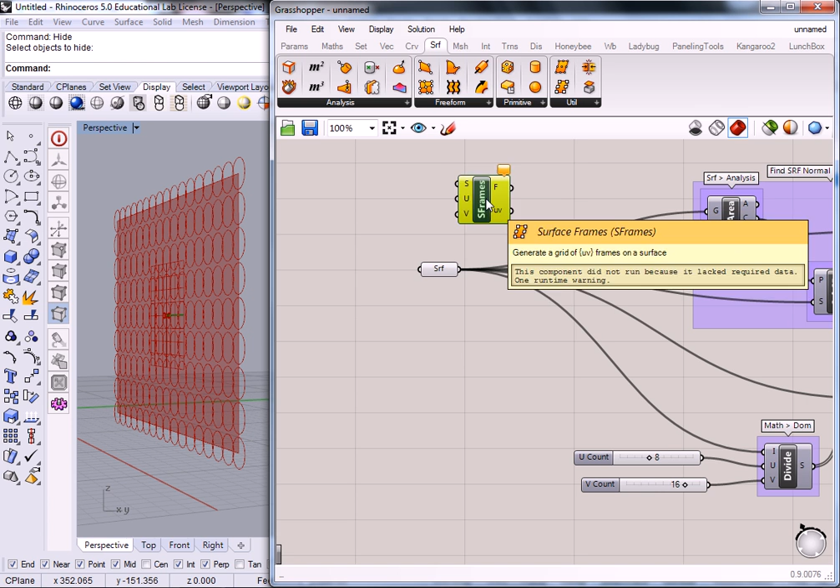Basically this surface, I can deconstruct it and get the edges. So under surface analysis... I don't know if that's what I want. Hold on. This one might be better. No. I might be changing my mind here.

Alright, let's do B-rep edges, we'll try it that way. So, B-rep edges. No, I changed my mind. Sorry guys, I'm just trying to get the right output. Wireframe curve should work, let's try it that way.

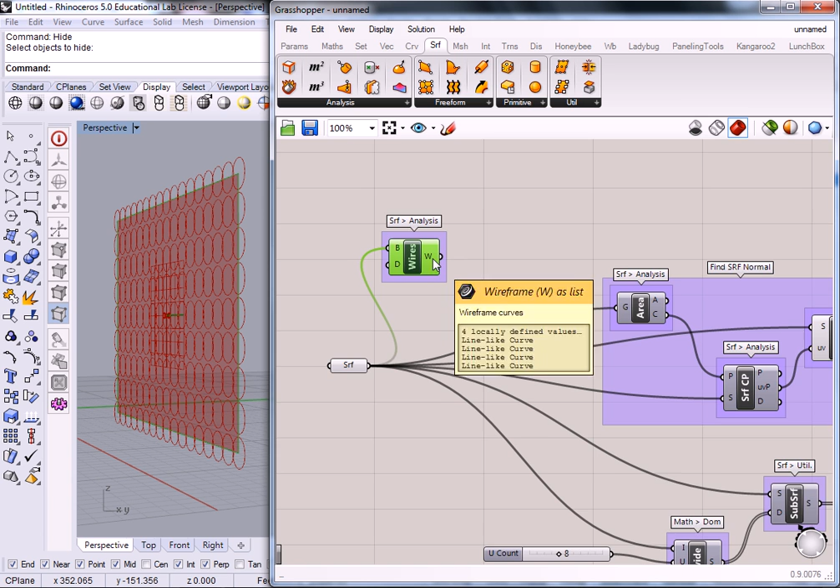All right, so under surface analysis, B-rep wireframe, I'm going to plug in the surface, and it gives me 4 line-like curves. So those 4 line-like curves are the outer edges of the surface itself. So what I can do with that...

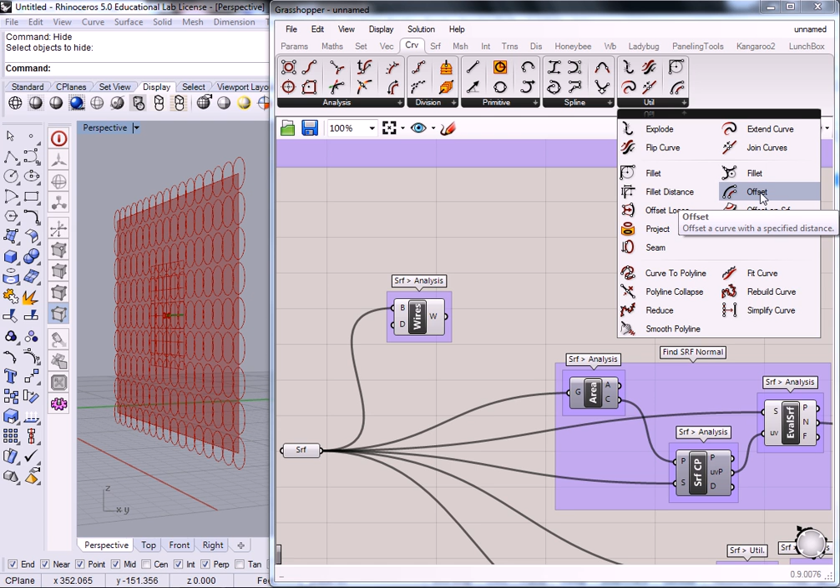Is to offset them. So that's under curve, either analysis or utility. I think it's under utility. Yeah, curve, utility, offset. Move this down. So it's going to ask me for the curves, it's going to ask me for the distance, it's going to ask me for the plane of operation. In this case, it's just going to match the surface itself. And the corners thing is just a setting for how you fix the corners up.

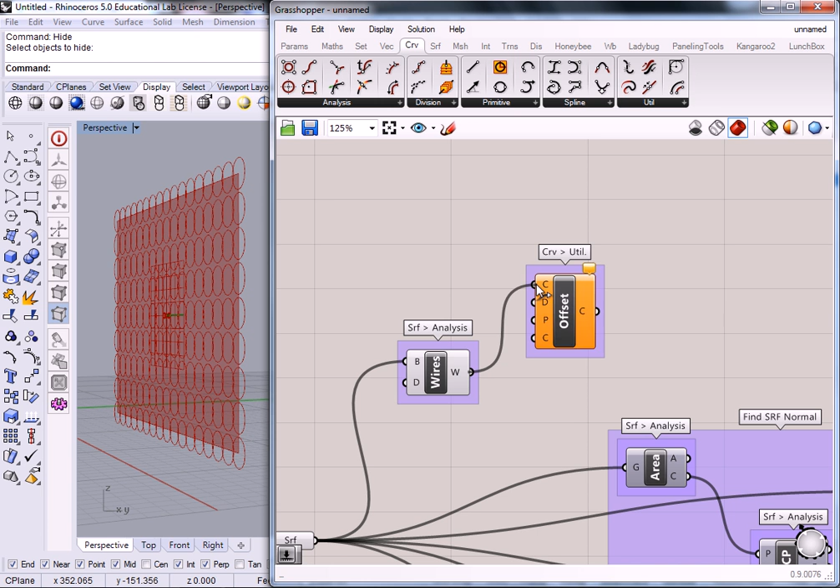So right off the bat, I'm just going to plug in my wires into the curves. And that is not at all doing what it should be doing. Oh, let me try plugging in the plane. So if I can borrow the frame... there we go, that did it.

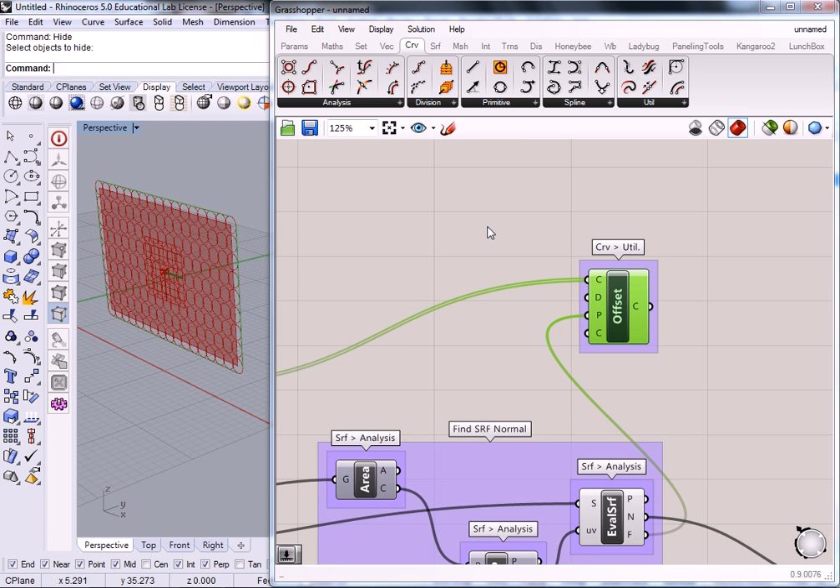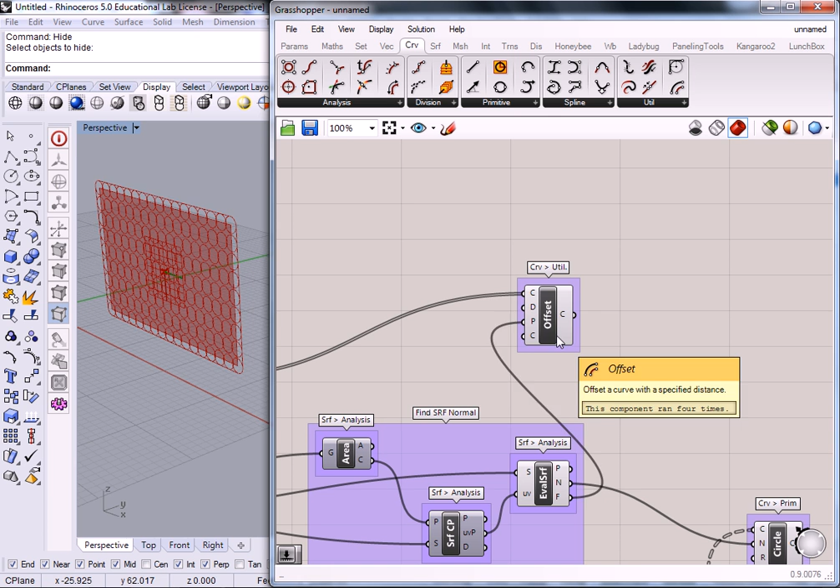All right, I didn't think I was going to have to do that, but I do. So with the reason I grabbed that frame, let me walk you through this. What was happening was that I noticed my curves were out of plane.

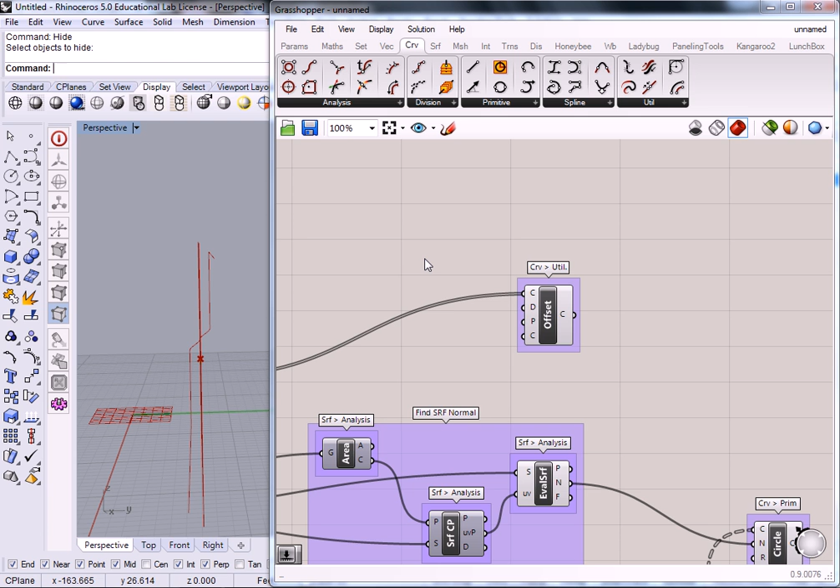And so one of the things we're going to run into quite a bit is that Grasshopper sometimes has a hard time ordering things, particularly with the direction of things. So sometimes if you have a series of surfaces that you're trying to offset, either outwards or inwards, occasionally you might get a surface of a group that offsets the opposite way. So sometimes it flips the normals, and it's one of those challenges that I haven't quite mastered yet.

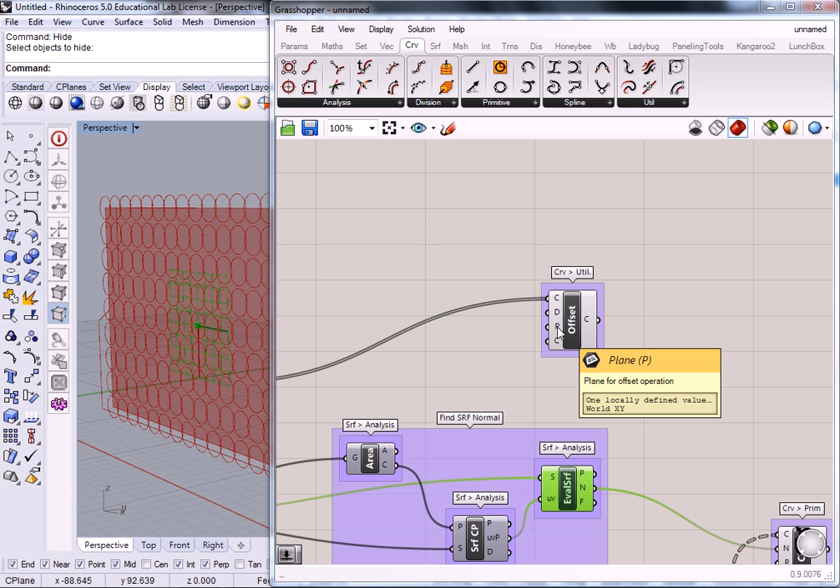But anyway, what I tried was to predefine, because right now the plane is in the world XY, which means it's flat, even though my surface is vertical. So I figured if I took my frame, which is the evaluate surface frame right there, and if I made that my plane of operation, then it should straighten it out, and it did.

That would be these here. Can you see them around the edge? Yeah.

Now, the other thing about this is that it went outside of the surface, which is okay, but really what I want to do is offset it to the inside of the surface. So I'm going to, oh, you know what? I need something else. I'm going to need two of these, yeah, I'm going to need two of these normal frames.

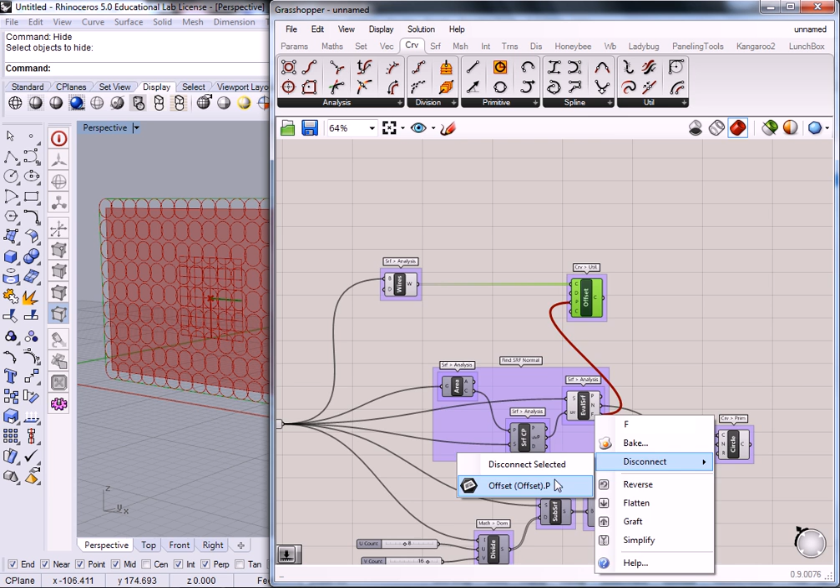Let's disconnect. Sorry guys, I need two normal frames because I'm going to create a separate surface. So let me move that down, and I'm going to copy the normal frame up. I want to pause to make sure you guys get to this point correctly, because it's getting a little wild.

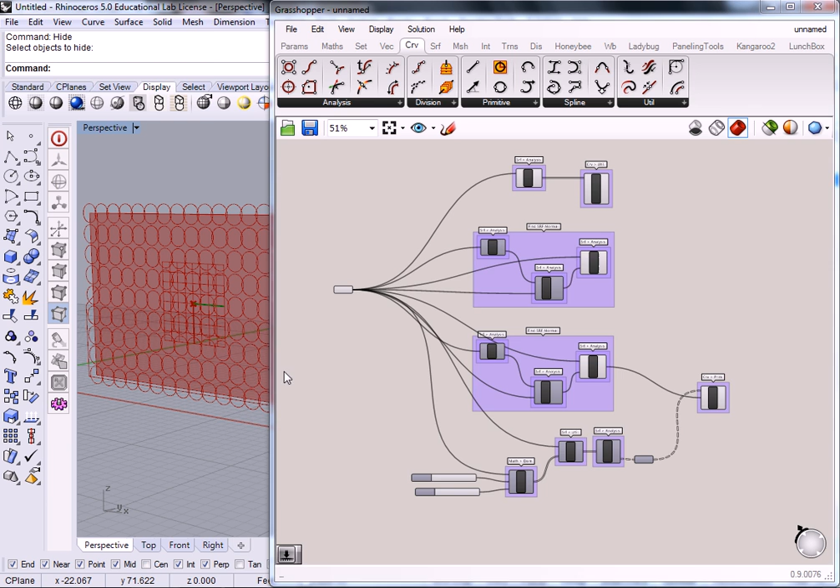All right, so I'm going to pause here, make sure you get to this point. All right guys, back to action here.

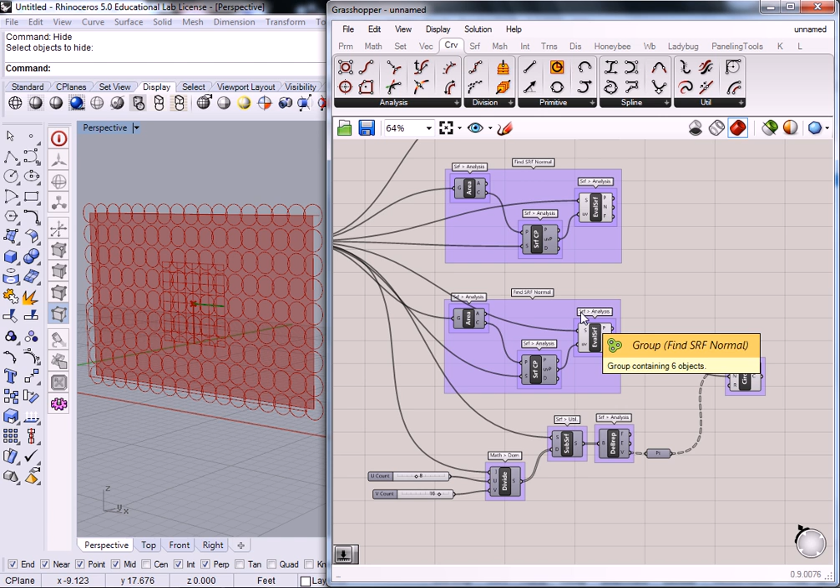So what I've just done is I kind of took us on a detour, right? And I think before I do it, I want you to understand why. What I realized is that if I use the frame here, is that frame going to change? It might be a circular reference. You know what, I'm not going to worry about it. There's a chance it's going to be a circular reference if I modify that surface and then kind of push it back into the beginning in order to trim it down. Because our goal is we want to trim down the domain of this surface so that our perforation is fully within the surface itself. Does that make sense?

So it looks kind of like this anyway. This frame is going to plug in there. So we've got our offset, and then we have to tell it how far and which direction. So the direction right now is 1 in the positive direction, which in this case Grasshopper is telling us is outward from the surface. So what we need to do is limit the offset to go inside by changing it to a negative value.

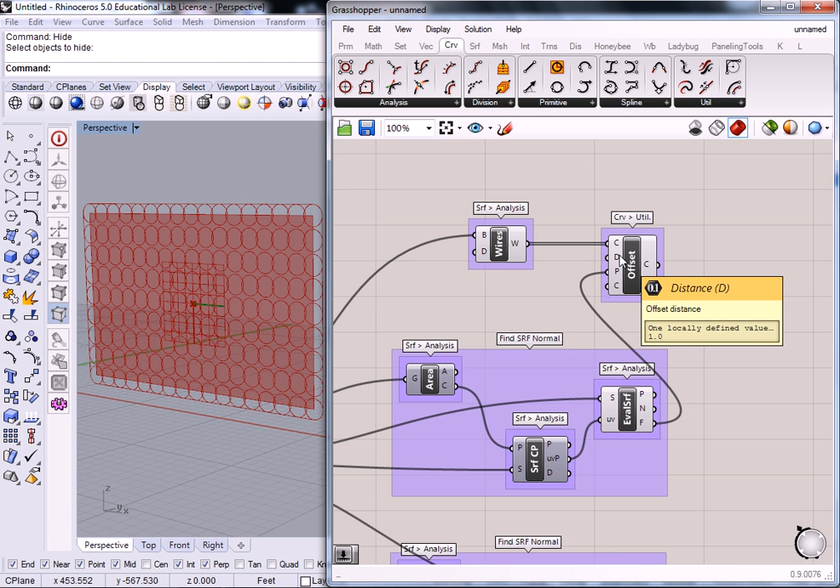It's another important principle that I'm just freshly introducing: direction is mathematically positive or negative. So really all I need to do is create a slider, 0, less than 0.55, less than 2, something like that. Now technically you can make a slider that is negative, that's fine, but I want to use a positive number and transition it to negative, for no other reason than I want you to know that you can do that.

Okay, so under math and operators, there's this cool component called negative, and all it has is one input, one output. It takes a number, converts it to a negative number, and pushes it out the other side. So now the x of 0.55 turns into a negative 0.55, and then we plug that in to distance. And what you see, if I put it up a little higher so it's a little greater, is that the offset curves are now inside the surface.

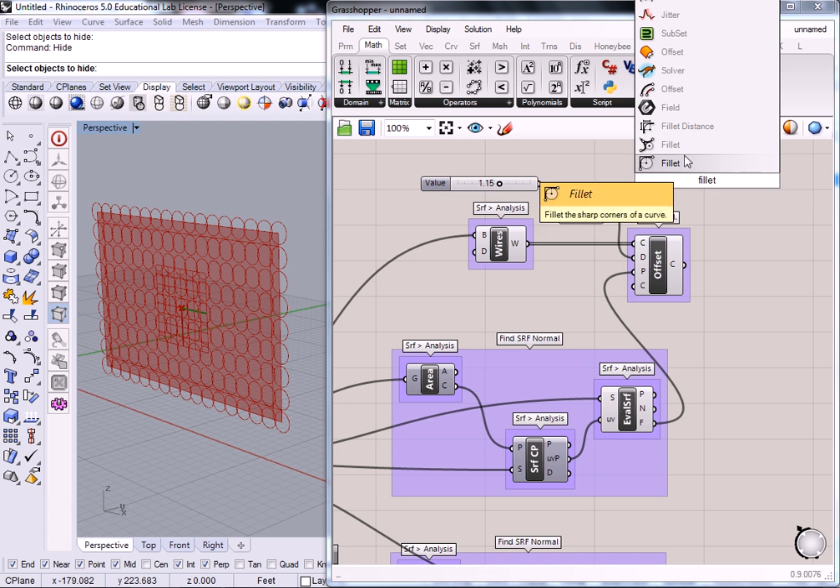I wonder if this lets me do it with multiple curves. I've never actually used fillet before. I wonder if it works. I don't want to try that.

So anyway, what we need to do now is create a surface off of these curves. I'm trying to recall which one I actually used without having perfect corners. I think it was edge surface. Oh, I don't like that. Hold on.

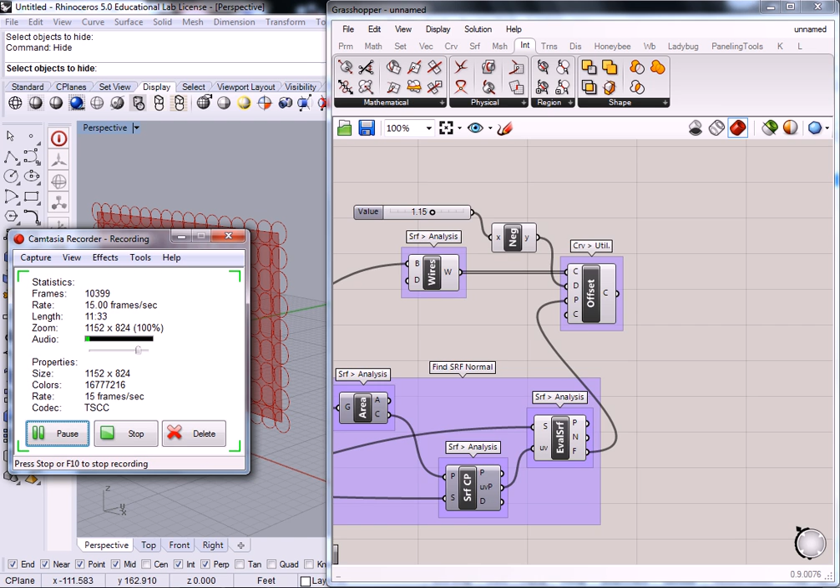Multiple curves. Maybe I do need to fillet it. Hang on a sec, guys, I need to look something up. All right, I remembered the simplified way. Rather than trying to fillet the edges, which I recall you had to individually select one and then the other, and then fillet it, and then do that 4 times - yeah, you don't want to do that.

So the cool thing is, under surface and freeform, what you can test for - and this is more analysis stuff, guys, I'm running you through the gamut of a bunch of different ways of thinking, okay? It's going to be mind-boggling, but check this out. With a 4-point surface, if I can just find the point of intersection of each of these curves, I can map a surface between those 4 points.

Although, actually, it wasn't that one. I wanted to do... darn, I just lost it again. No, it was... all right, so it was surface from points. It's pretty much the same thing, but 4-point surface is an example of what you'd have to do, but I didn't want to use that because you have to plug in each point individually. Don't want to do that. So with surface from points, basically any 4 points in space can create a surface.

So I use surface from points, and it's going to ask for points as a list, and then a couple of other settings, which I'll get to. Surface freeform.

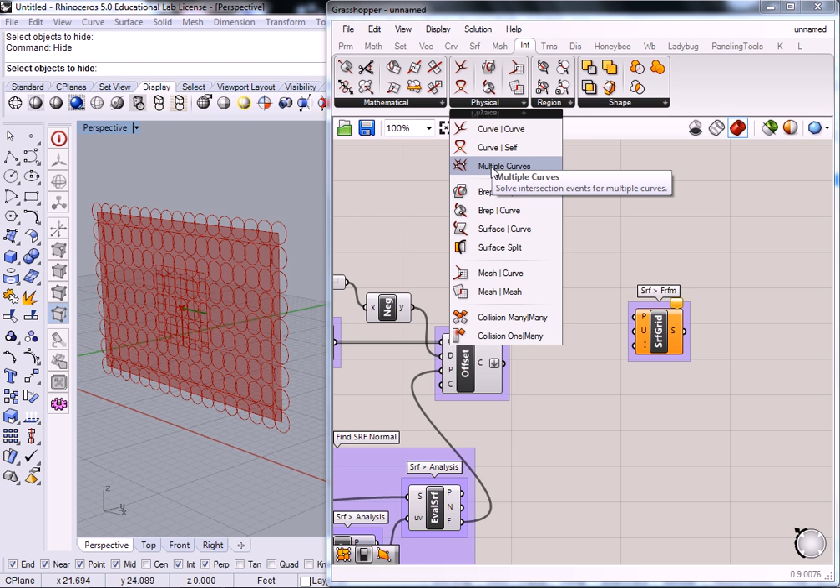But what I need is the intersection of those curves. I need to get a point there. And this one is really cool, it's our first foray into the Intersect tab, under the physical panel, called Multiple Curves. It says solve intersection events for multiple curves. If you look at the icon, it tells you everything you need to know. When I drop it in, it's going to ask for a list of curves, and what it's going to test is really just anywhere those curves intersect, and it's going to output points. It also outputs indexes of the intersections.

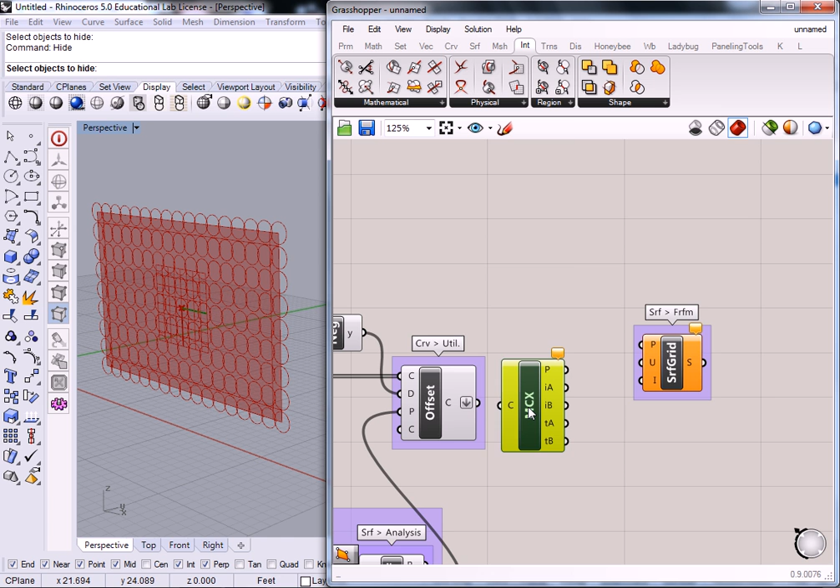Okay, so I plug that in. What you notice is that now there are points at the intersections. Pretty simple so far.

With surface grid, I plug points in. Yes, flatten the C output, right? Oh, did I flatten it? Oh yeah, I did. Sorry, I did that before I started the video up again. Yes, flatten the C output. Thank you for picking that up.

Yeah, you have to flatten it. Let me explain it this way. You have to flatten it so that it reads as one list, because if it's not flattened, each one of those items is only searching for an intersection within itself, of which it's impossible.

Harrison seems really confused here. So let me describe it this way. The intersection test is going to test a list. A list. One list.

If I plug in this, not flattened, technically I'm plugging in 4 lists. Now it can run 4 lists, but it will run all of those 4 lists separately. So if those 4 lists only have one item in them, there's no intersection. It won't return anything because one item can't intersect with anything.

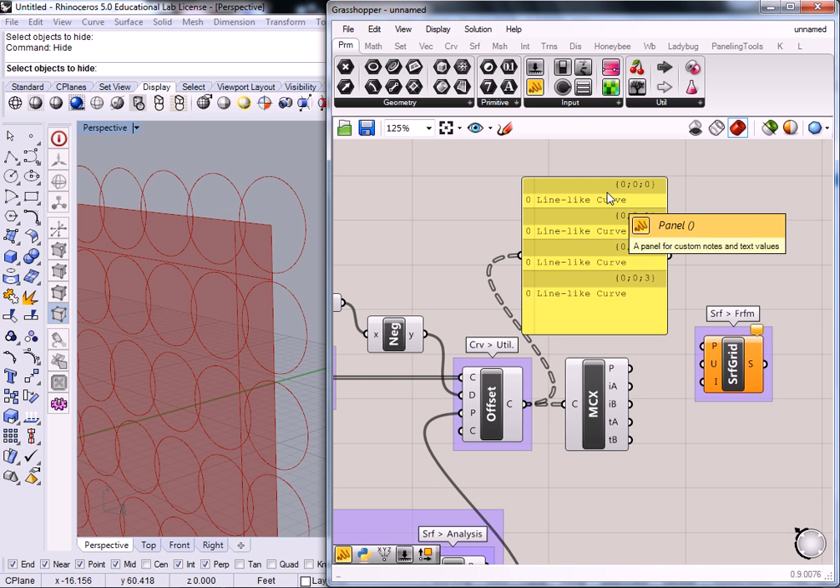Does that make sense? Okay, so that's why flattening and grafting and stuff becomes very, very important for a lot of things. So anyway, we flatten it. We get our intersections because now it's testing one list of 4 items.

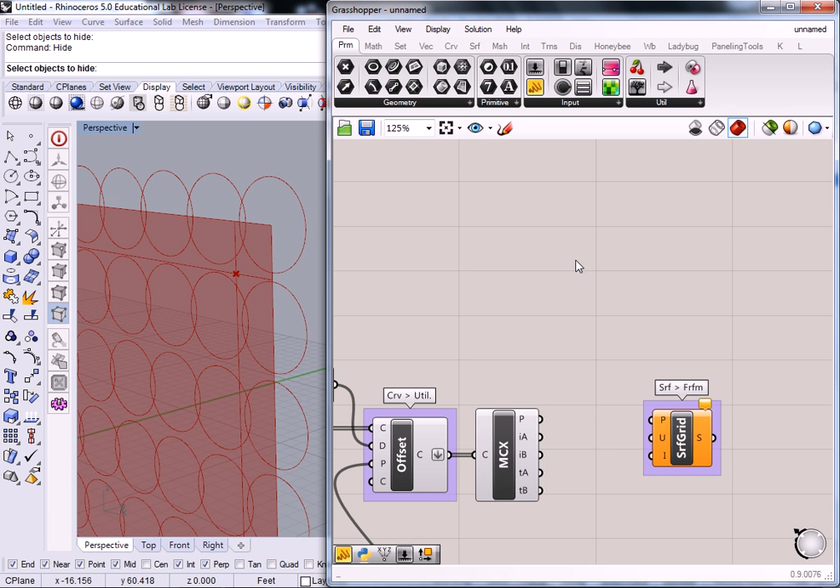And we can plug that in. The P output, we plug it into the P input of surface grid. The one non-intuitive thing here is the number of points in the U direction. It's really asking, because what it's trying to do is technically create a surface from many points, and it's going to test how many of them to create a surface through.

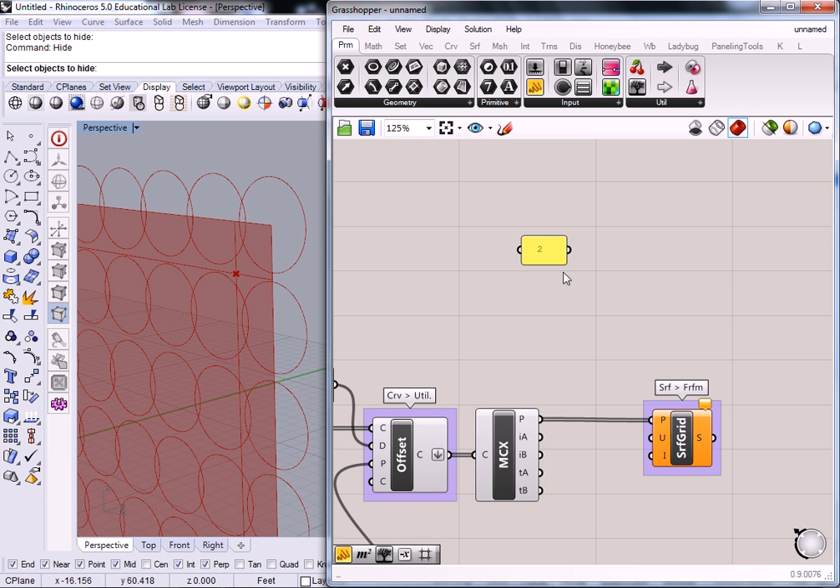So if it's square and there are only 4 points, in the U direction, that means you're going across the surface one way, you're only going to 2 points. Very good observation. So put a panel in with a value of 2, plug it into U. So that was under intersect and physical.

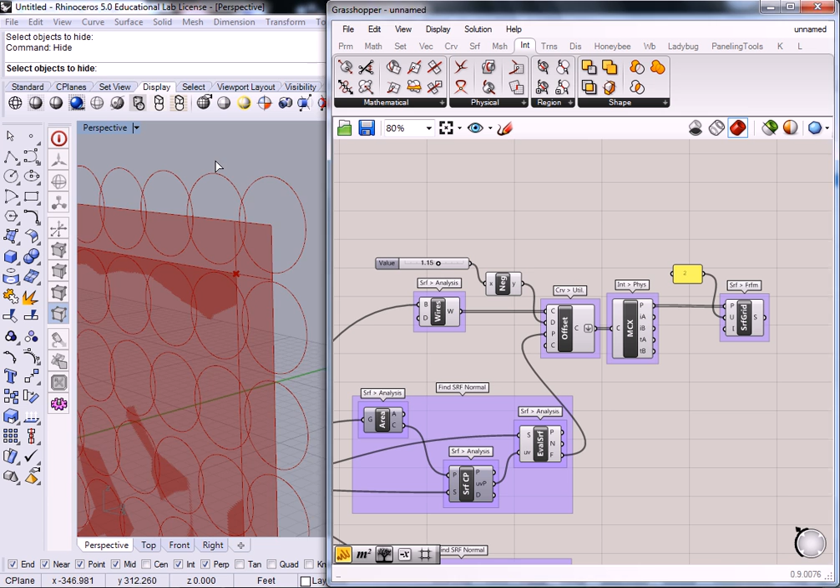All right, so real quickly I'm going to turn a few things off. I don't think I need the outer wires anymore. I can turn off my offset curves. I'm going to turn off my evaluate surface. I'll leave the points on for now.

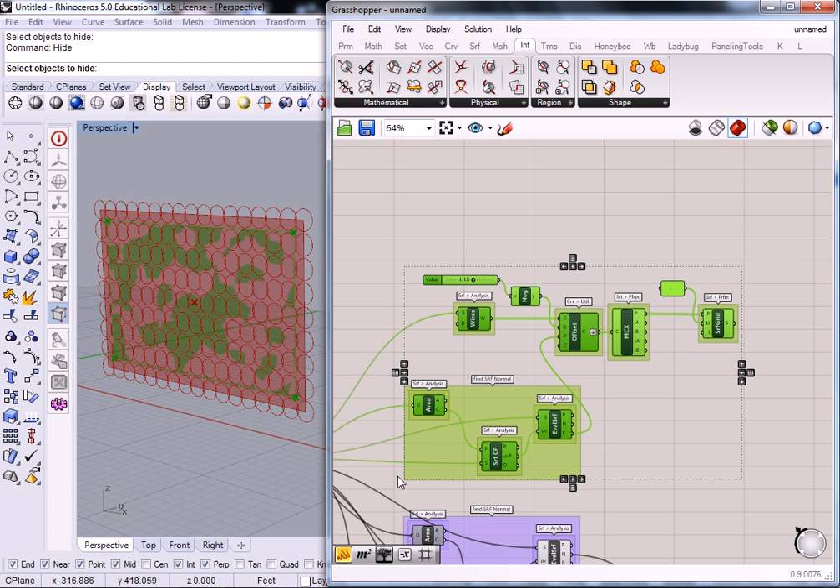So here's something that is very, very significant. I know my video is getting long, but I want to wrap this up in one thought. What I've done is replace the surface connection for all of these. The reason is that these circles are all mapped off of one surface. The exercise above limited that surface. So now my new surface connection is here.

So my goal now is to disconnect all of the original surfaces and reconnect them into this at the end. Does that make sense? When you see it, it will.

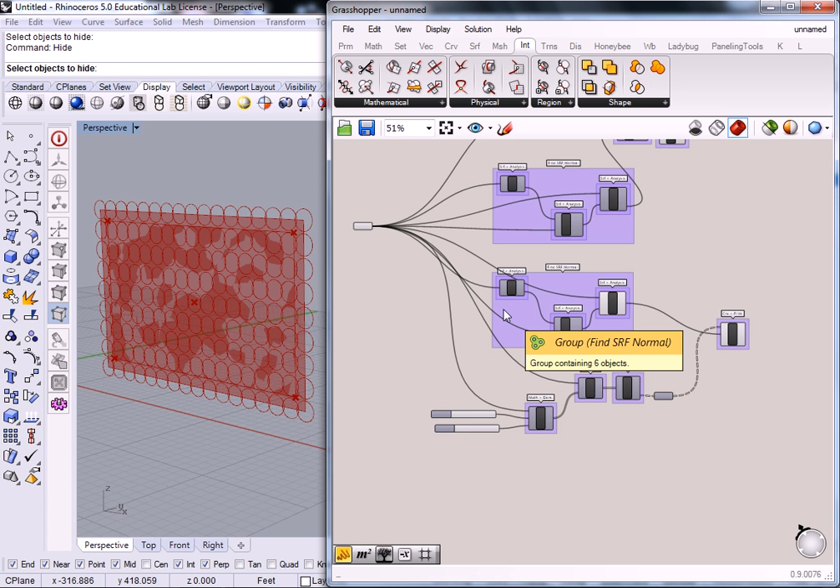So, all right, so this is how I'm going to do this. I'm going to make it kind of simple. This is a completed idea, so I'll group it. And I'm going to place a param for a surface. Now I described params to you before as an empty house for data.

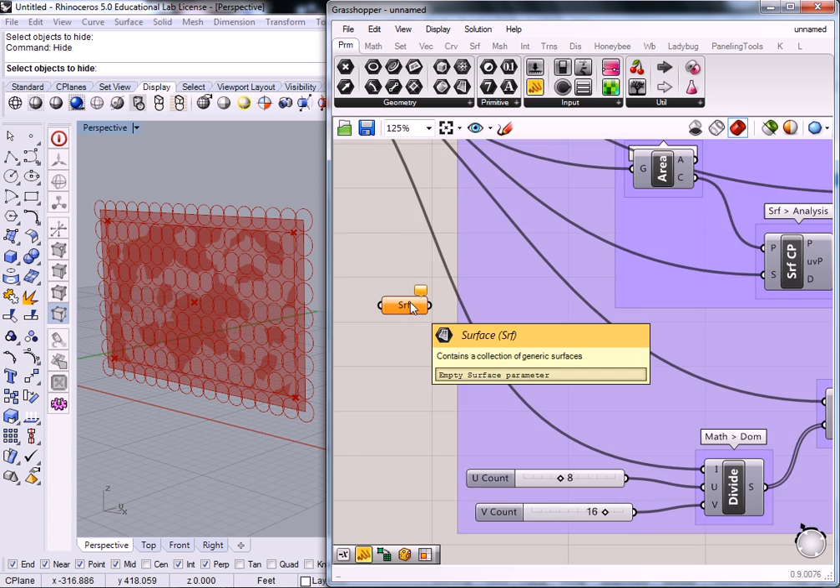So if I have all of these wire connections, do I need to pause and wait for you guys? Are you guys falling behind? Okay, you can call out sooner if you need me to pause and hang back, because this is going to be important to know. So actually what I'll do is stop the video here and start a new one fresh for the last part.